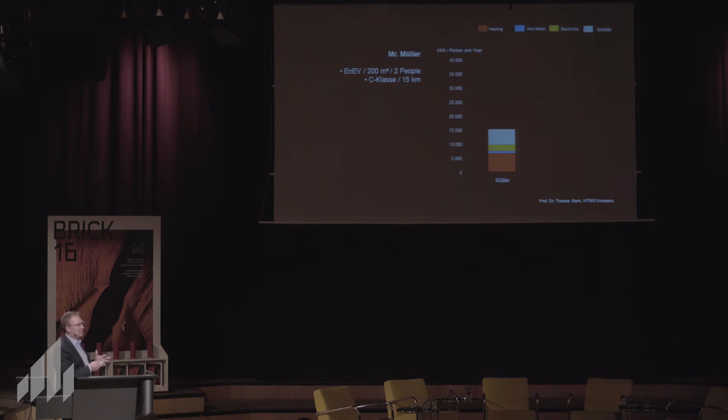The first one is Mr. Müller, and he lives in a house with 200 square meters with 2 people. Thomas is also from Stuttgart, that's why he has to use Mercedes as a reference, it's kind of mandatory. So he's using his C-Class Mercedes, like a middle-class car, and he's commuting 15 kilometers every day to work. So what's his personal balance? The red is heating the house, yellow is basically appliances like computers, TV, screen, etc., and the gray piece on top is commuting.

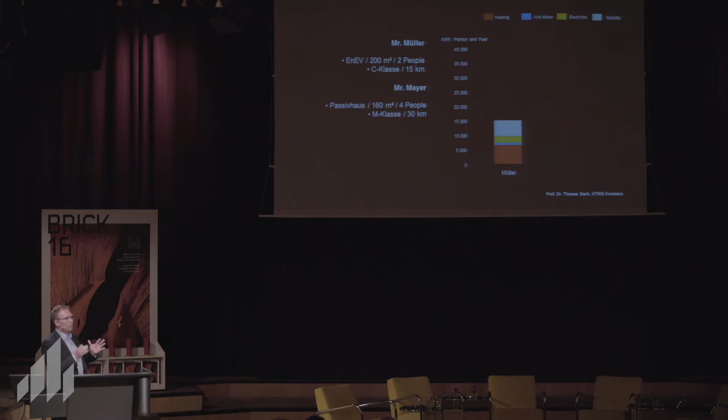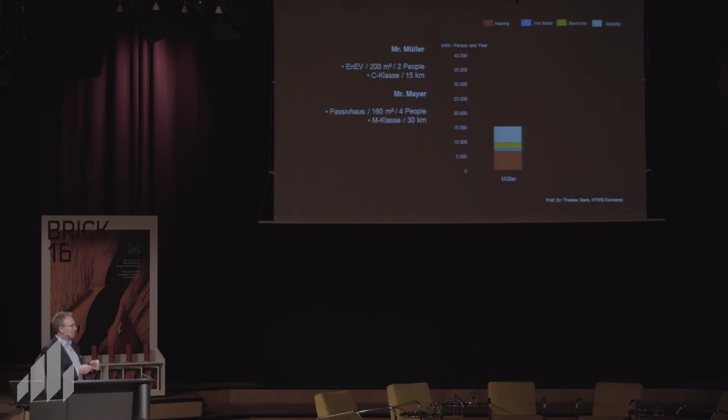Now he compared it with Mr. Mayer, who lives in a passive house, obviously the highest energy standard in housing, and he lives on only 160 square meters with 4 people. So only 40 square meters of building operation is dedicated to him, but he loves his SUV, he has an M-Class, and he is commuting 30 kilometers because you cannot build a single-family house in the city anymore. So he put it outside the city, commuting 30 kilometers every day with his SUV into the city, and then suddenly this is his balance. It's a very simple equation: the building doesn't matter anymore, it's his commuting which makes his personal balance.

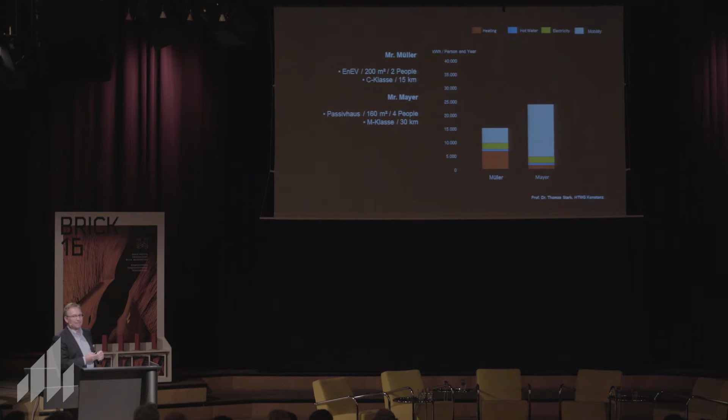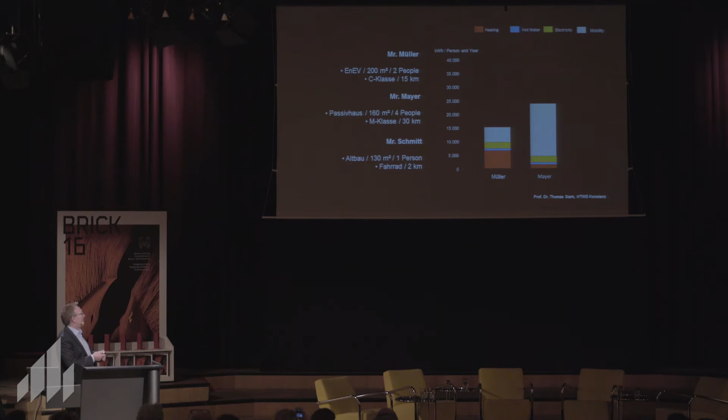And then he compared it with Mr. Schmitt, who lives in an Altbau building, an old flat, 130 square meters by himself, and he's biking 2 kilometers every day to work. We always call him the green professor, probably at the TUM, living in Schwabing in Munich. But that's his personal balance, so it's even worse. But he could fine-tune his balance by renting 1 room to a student, so then he would cut the red bar into half.

So what I want to say is, if we make the balance more holistically, and if we take the whole lifestyle into account, if we start to personalize it, we get to a different perspective. We change the perspective and we start to recognize it's not only about insulation, it's much more. This is basically the 2000-watt society idea in Switzerland. This society model in Switzerland is very valuable and very helpful to get a better understanding. So this was on a building scale and urban scale.

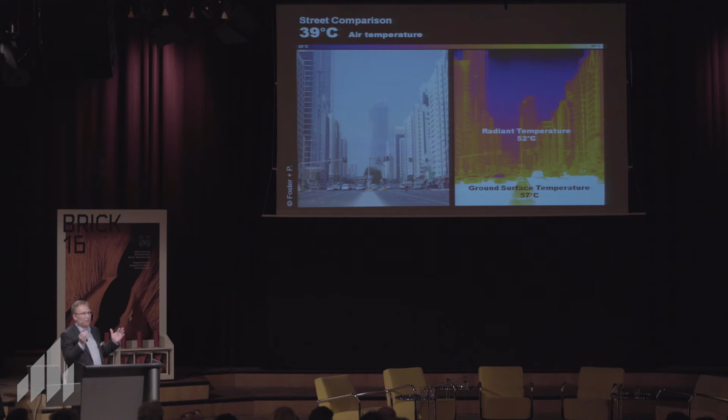The other thing is we get more frequent heat waves in Europe, all over the world, but also in Europe. This is an image from Dubai, which someone from Foster + Partners took. You see this streetscape in Dubai, the picture with an infrared camera. Everybody knows the situation: you walk over a 60, 70 degree hot tarmac in summer, and it's radiating into your face, and it starts to become unbearable. With 40 degrees outside, the radiant temperature someone is facing is 52 degrees, plus he is exposed to the sun, so all of a sudden this environment is unbearable for people.

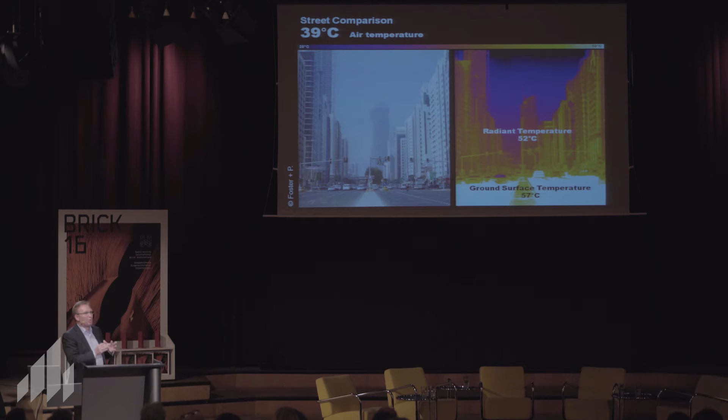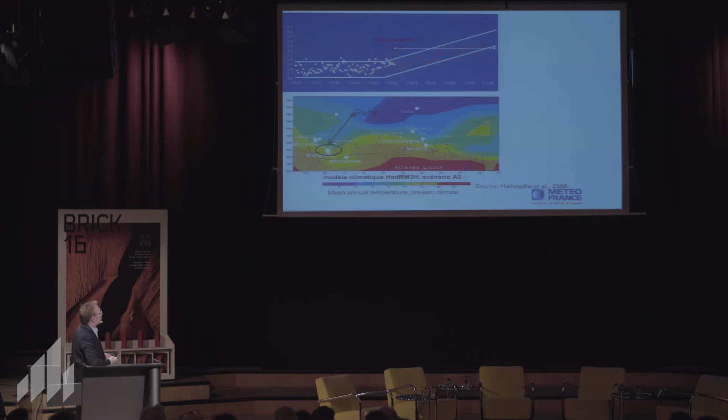This is a statistic from Météo France, which is very interesting. This upper diagram shows the average summer temperature over the past 100 years had been within this band. Then all of a sudden, there was the summer of 2003, and you see how temperature is going to go up over the next 100 years. We recognize that the summer of 2003 is going to be a very normal summer in 2050, and the coldest summer they have in Paris in 2100.

So we have to act, we have to change something if we want to avoid getting air conditioners on every single window. The problem that happened in Paris was a combination of this heat wave and urban heat island effect. It was not so much the urban heat island effect during the day which was the problem—Météo France measured during the day only 1 degree more at peak temperature than outside of Paris.

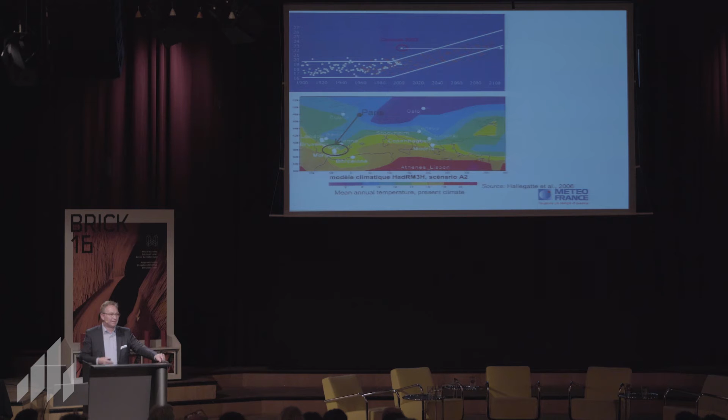But at nighttime, they measured 10 degrees more. Whereas outside of Paris cooled down at nighttime to 20 degrees, downtown Paris stayed at nighttime at 30 degrees. All our buildings without air conditioning heavily rely on cool nighttime temperatures so that with natural ventilation we cool down the thermal mass of the building. This didn't work anymore because the city didn't cool down at night, and all of a sudden they had 40, 45 degrees in the buildings. Then elderly people started to die.

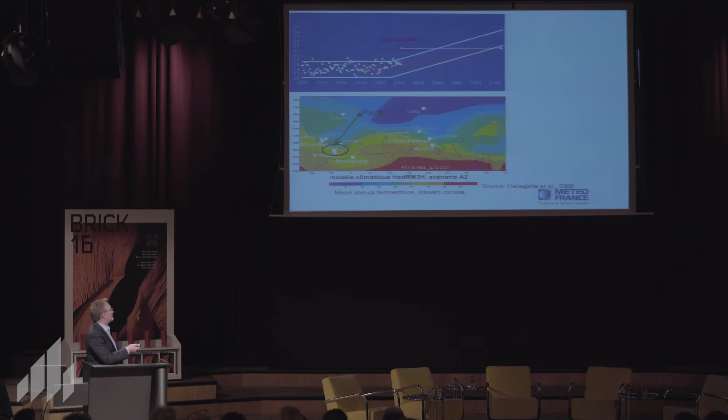So this is the requirement: we have to create livable cities. Of course, we have to create a better environment. We need to talk about mitigation, minimizing carbon emissions. But we also have to talk about adaptation—how do we adapt our cities to achieve a better, more resilient climate in our cities?

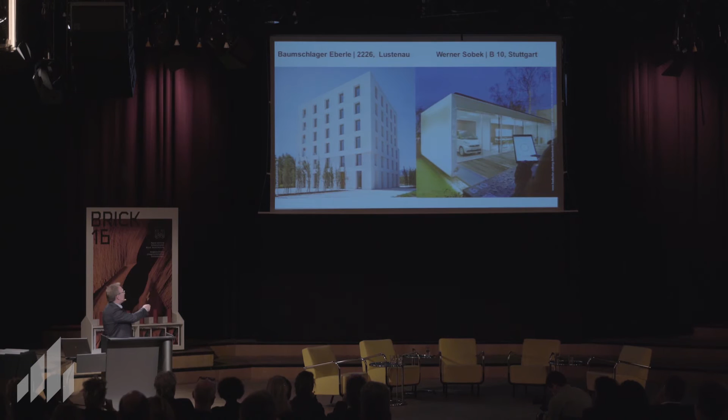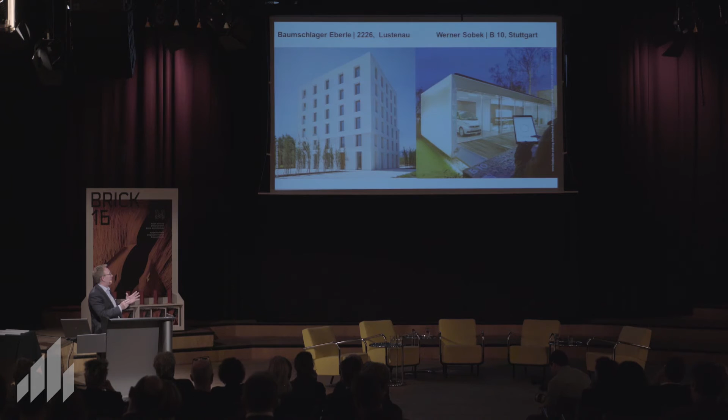Now, looking at some examples on a building scale, this is one of the nominees—this is but a pure coincidence. This is the building of Baumschlager Eberle on the left side, the 2226 in Lustenau, which might be changing the perspective of building design. What they do is build 80, almost 75 centimeters thick walls to create as much thermal mass as possible to control the indoor climate and minimize technology. So no heating, no cooling, no mechanical ventilation, no air conditioning, but supplemented with smart technology using sensors to sense air quality, which opens the motorized natural ventilation flaps.

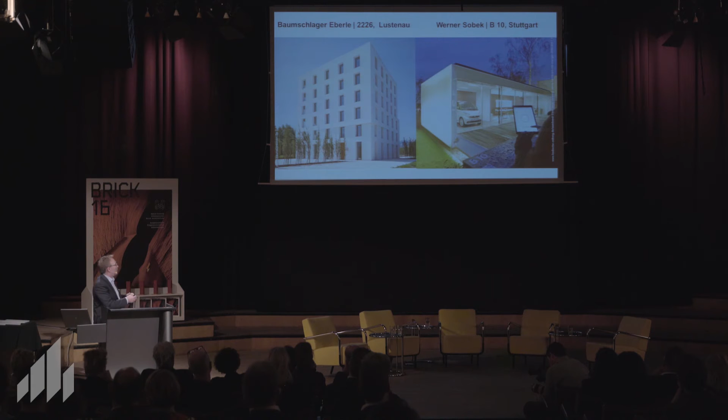On the other side, it's the opposite—the building of Werner Sobek. It's a research project, B10 in Stuttgart, which is all about high technology. You see the control panel, and it's basically supplemented with passive systems, with daylight and also some natural ventilation. So we see one building which is all about passive strategies supplemented with some smart technology, and the other, a high-tech building which is all about high-tech supplemented with some passive system.

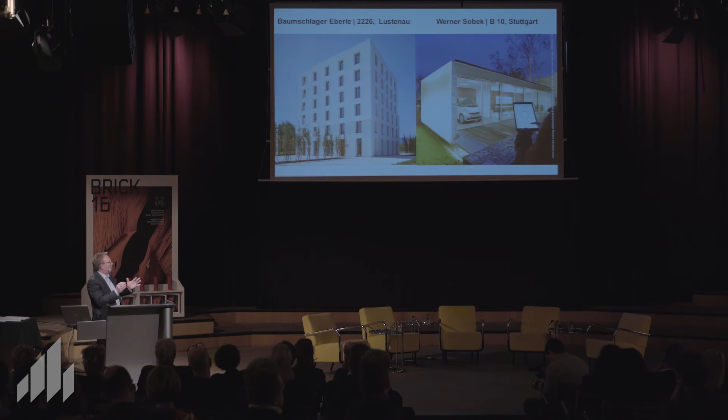Now the question is, what's better? What's the future going to be like? I'm not so sure, but I have my personal opinion: every building we did which was too complex never really worked. That's what we have to face—the more simple, the more robust buildings are, and the more simple, the better people understand how to operate them. That's the lesson we've learned over the past 25 years. But I'm certainly not the person to say we're going to see a future without technology—we're not going to go back into caves. So the question will be, how can we maximize passive strategies and supplement them with smart technology where needed?

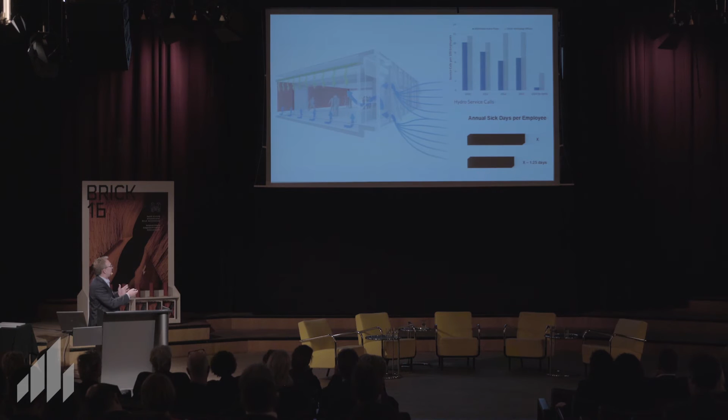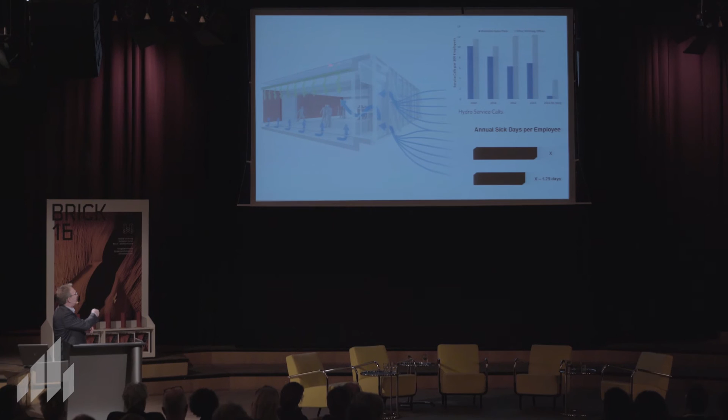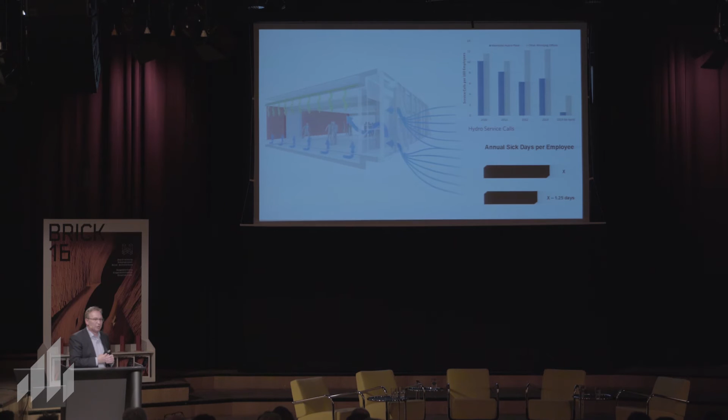Just one statistic from a building where we worked, which is in Canada—a high-rise building in Winnipeg in a very severe climate with winter temperatures of minus 35, summer temperatures of plus 35 degrees. The reason I show this is we put radiant heating and cooling into the concrete slab. So it's all about thermal mass which we activate, but it's a very extremely slow reacting system. If anybody complains it's too hot or too cold, it takes about a day to adjust temperature by something like 1 degree, so you basically don't even need to complain.

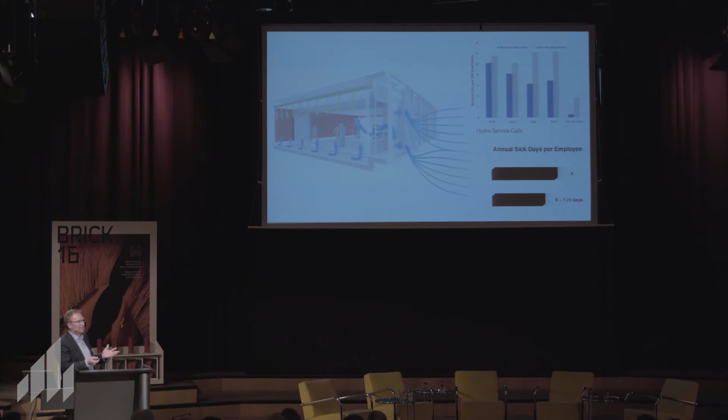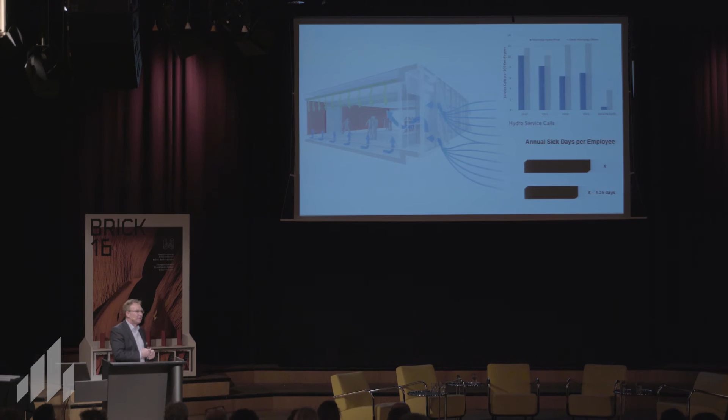Now, Manitoba Hydro, as a utility company, operates all kinds of buildings, and they have something like 10 or 20 fully air-conditioned buildings. As a Crown corporation, a public mission-driven company, they feel the responsibility to take the lessons learned from this building and publish it.

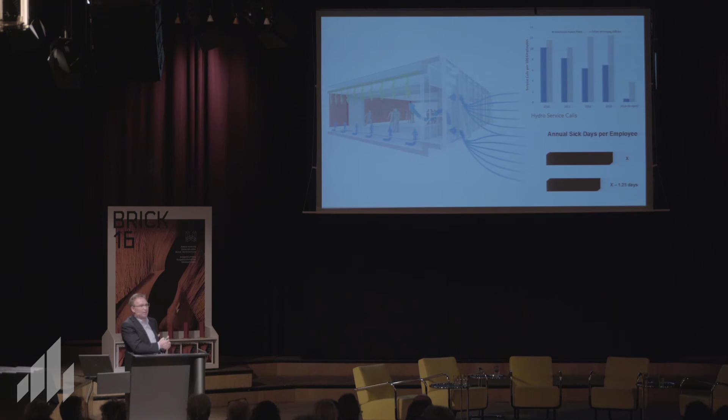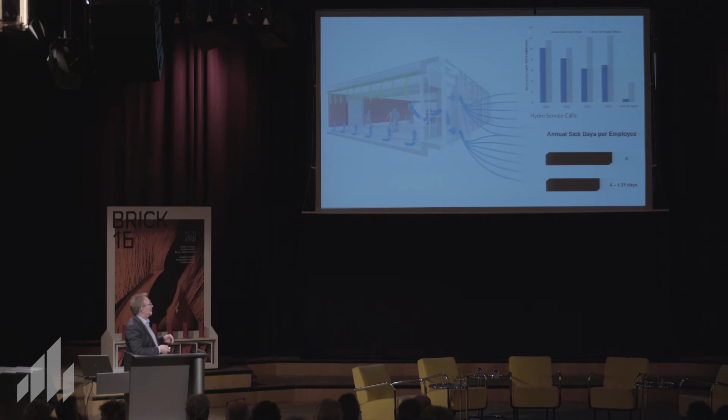So these are statistics published by Manitoba Hydro, we didn't come up with these statistics. In this upper diagram, they compared service calls for too hot and too cold in this building compared to the fully air-conditioned building. The interesting and funny result is that we get half as many calls for too hot or too cold in a building with no temperature control compared to a building with instantaneous temperature control. I have some ideas why, but this is strange and very unexpected. And second, we have 1.25 fewer sick days in this building with maximizing passive systems compared to their fully air-conditioned building. These are two objective results of a building compared to others which we can't neglect.

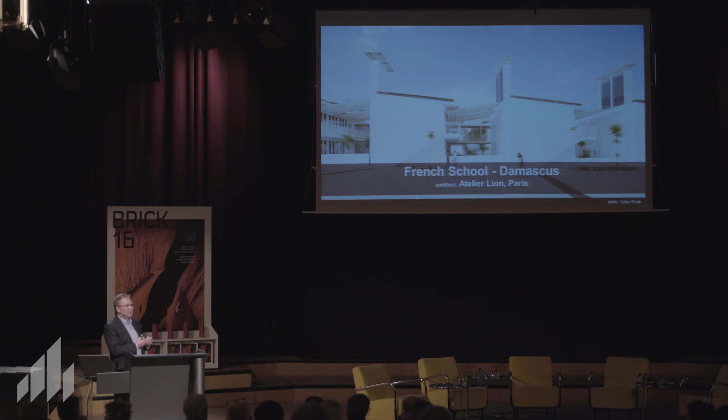So talking about passive systems on buildings we worked on, this is the Damascus School, the French school in Damascus, where we had the fortunate situation to work with Atelier Lion from Paris, architects from Paris. It was the parents who approached us and said, can you do a building in Damascus without air conditioning? So we studied the climate data and saw that Damascus actually cools down significantly at nighttime. In summer, every day they have temperatures of 40, 45 degrees, but it cools down at nighttime to something like 20 degrees. We said, how can we maximize this nighttime cooling?

So what we did, we created courtyards in between these two-story classroom buildings with some vegetation and shading to create a nice microclimate. We take the air from these courtyards and draw it through pipes embedded in the ground slab before the cold air is supplied into the space, then we exhaust it through solar chimneys. Hot air goes up, and if the sun heats the exhaust air further, you keep this natural ventilation going. There's no fan in the system, no mechanical unit. We have more pipes in the ground slab which supply air to the upper classroom, also driven by the solar chimney.

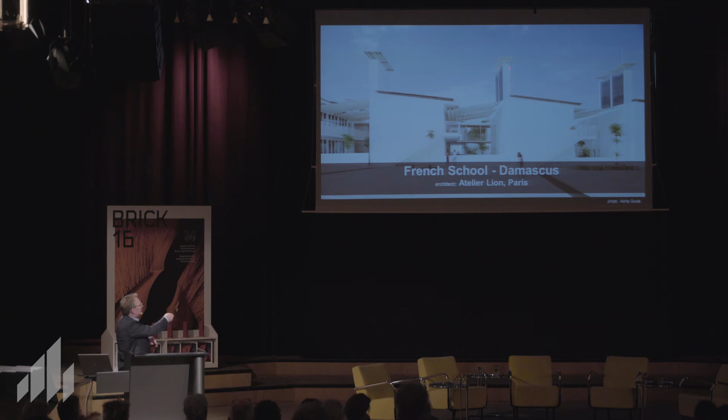The solar chimney is exposed to the west so that we get the low sun angles in the afternoon, heating up this masonry wall on the backside, which is painted black. So this wall stays hot overnight, and it keeps the natural ventilation running at nighttime to cool down the floor slab, to cool down the thermal mass of the building. And by doing this, we achieve...

Now the question, what is comfort? We achieve, in my mind, highly comfortable conditions. In our simulations, we showed that we can keep indoor temperatures at the end of a hot period, at the end of the day, at something like 30 to 31 degrees. And the parents said, 31 is fine at 45 outside. In the meantime, we have adaptive comfort standards where we can actually prove this, that it's really comfortable in those extreme conditions. Before this unfortunate civil war in Syria, the school wanted to extend the building using the same system again, which for us is always a proof that they really like the conditions they have.

And then the other one is here in Europe, the Ricola Building in Switzerland by Herzog de Meuron Architects. Ricola, for their herb storage, require very precise humidity: 50% relative humidity, plus minus 5%. The most high-tech material we still have for controlling humidity in an environment is rammed earth. So the idea was pretty clear early on that this should become a rammed earth building, and Martin Rauch from Austria built it finally.

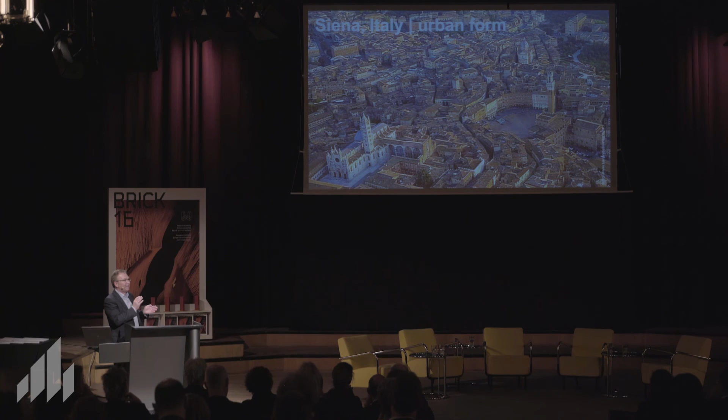I like to show Siena, because Siena measured their urban climate and figured out that they have a negative urban heat island effect. At peak day conditions, the temperature in downtown Siena is cooler than it is outside of Siena. That's interesting because you don't even see vegetation or other things to improve the climate. This is purely achieved by urban form, materiality, shading, having thermal mass exposed to the public realm, and trying to avoid that the thermal mass is exposed to the sun during the day. This is how this was achieved.

Then two projects we were involved in. One is the Breathe Austria pavilion, the Austrian pavilion at the Expo in Milan. It was about how we can bring the performance of a forest onto a space of 560 square meters. How can we accelerate the performance of a forest by using fog and elevated air speeds to improve the climate? So this was the idea: the 3.1 hectares of forest, the performance we want to get onto 560 square meters. And it worked pretty well.